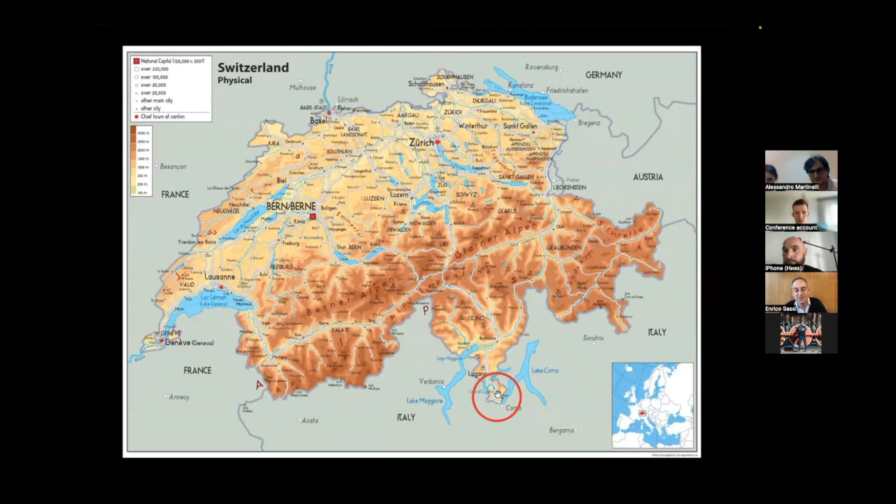They didn't have there a building in which to teach the science of beekeeping. The Casa dell'Ape is built here in Switzerland, in the center of Europe, in the Canton Ticino. In the south of Canton Ticino there is Mendrisio, and it's the place where the teaching center of Mezzana is built.

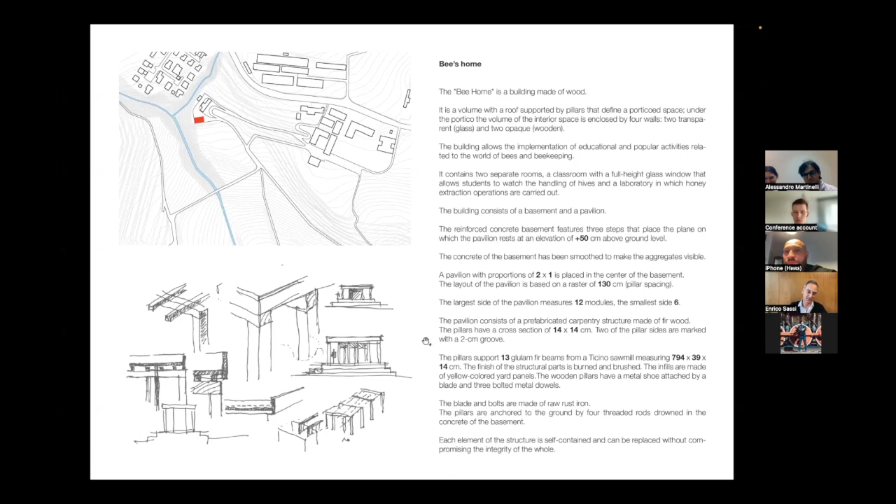The volume is basically a roof with pillars. It's the Tempio dell'Ape, the bee temple. The project is very simple, in fact. We build 3 steps, a platea, something to separate the architecture from the ground, like the classical temples. And after these 3 steps, we build a very simple wooden structure, a rectangle in proportion, with wood pillars.

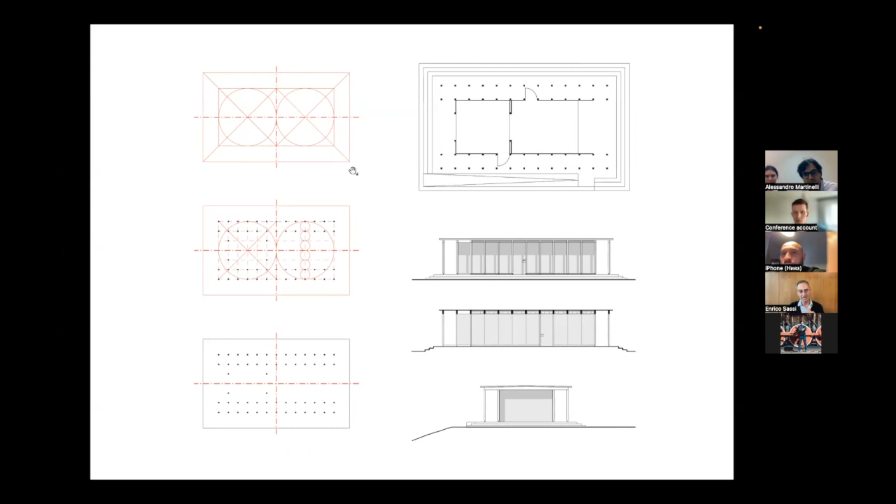The measure of the pavilion is also a rhythm, the raster. You have 12 modules and 6 modules of the partition, and then you have pillars prefabricated in wood and the roof.

This 2-room building has the laboratorio, where you make operations, so smielatura, when you work with the honey. And this is a classroom, and the classroom is open here, you look outside. This is a glazed facade, it's transparent, and this one is our opaque, it's wood. 2 blind facades and 2 transparent facades.

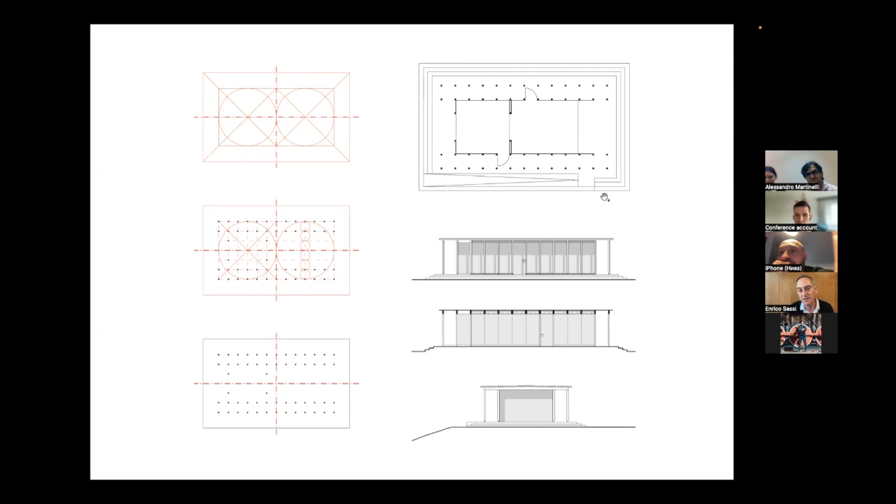This is the concept of the building. The building is light, it's in wood, it's prefabricated. Each piece can be changed without throwing away the building. So if you need to change this pillar, you change this pillar because it's autonomous.

And the building is constructed on this platea of Coldrerio, 3 steps to be up from the ground, transforming nature in culture. This is what Mario Botta also always says: when you put a stone on the ground, you change nature and you start to transform it into architecture. It's a very important, very sacred moment when you start to transform the surface of the earth.

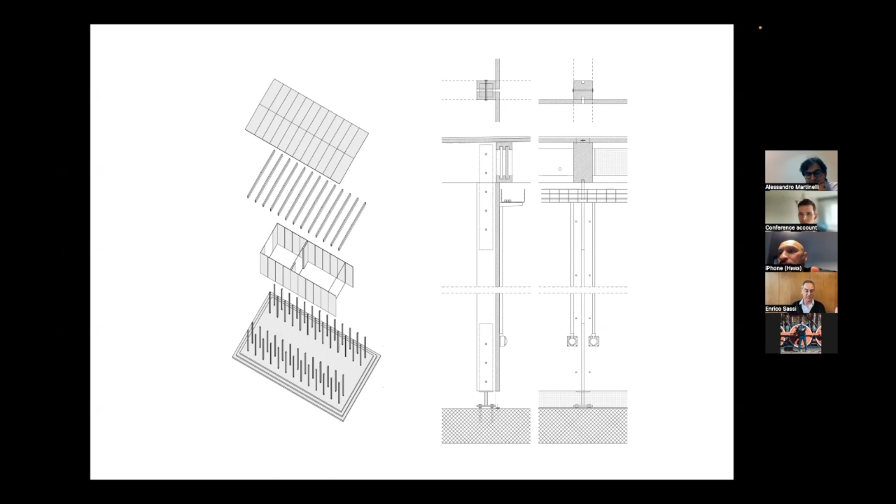We did some experience about this. These are the pillars. The pillars are burned and brushed, it's not painted. And the pillars are connected with this beam.

This is a design we prepared with the carpenter. The carpenter worked a lot, not on the site, but in his own laboratorio. It's a really prefabricated building.

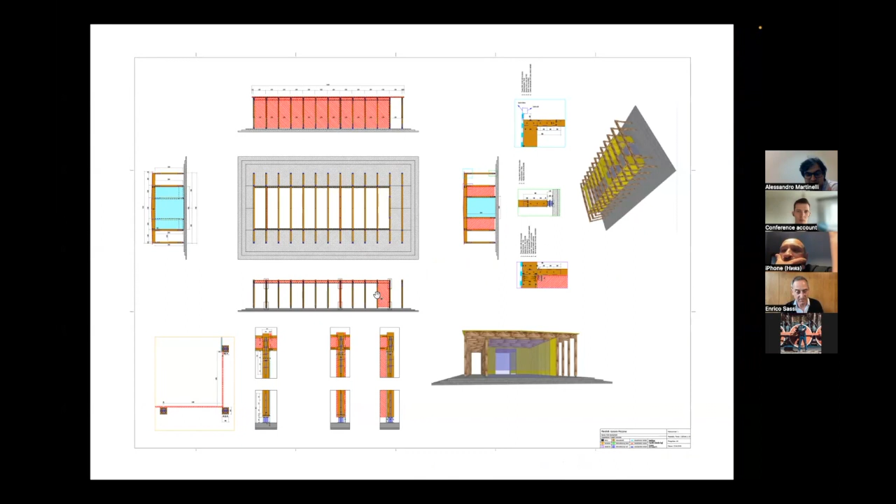We did some studies here. These are metal pieces to connect the wooden structure.

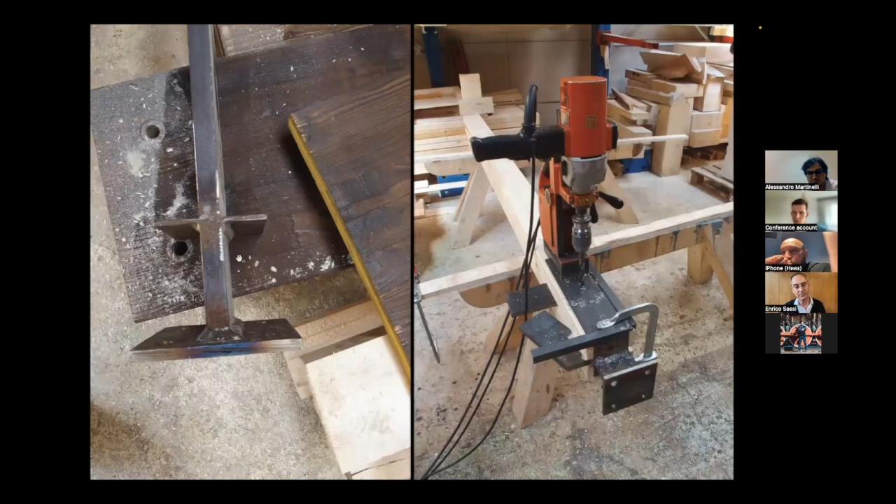Those are the pillars. The pillars receive a kind of design, you make here a cut, it gives more elegance to the pillar. And this leitmotif appears in all the structure. This is the metal structure that connects the pillar to the ground.

We've fabricated this, put inside the wooden pillar. The wooden pillar is burned, then brushed. When you brush, you need to brush in the direction of the vein, along the vein, exactly in the direction of the growth of the tree. It's like an old wood - you see the veins.

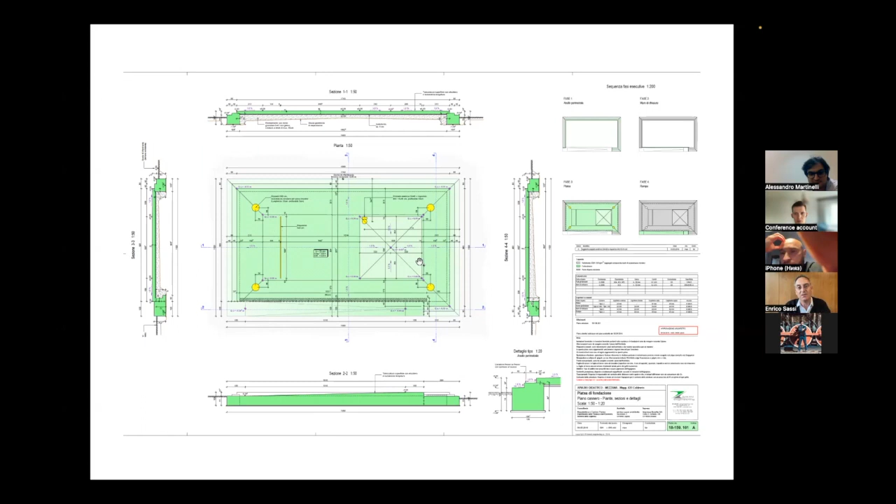With the engineer, we did also an important part, the concrete part. This is the sacred moment when you arrive and decide where the building goes, you trace the axis of the building. This is the engineer.

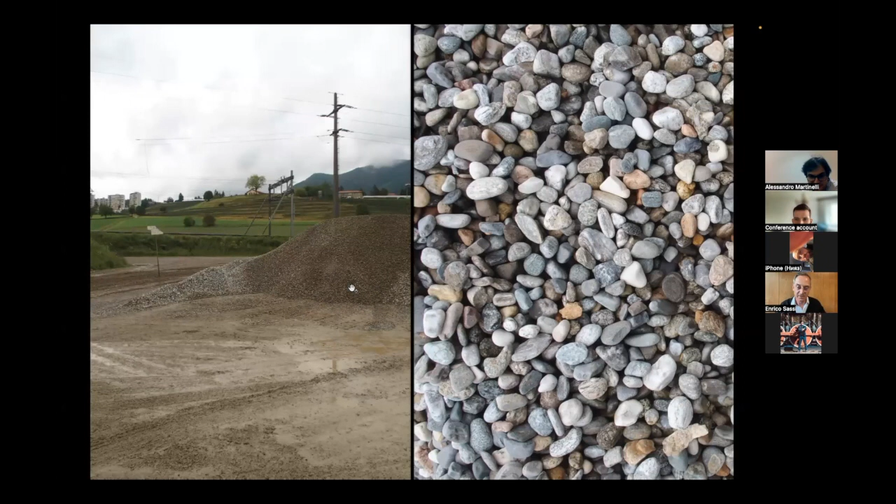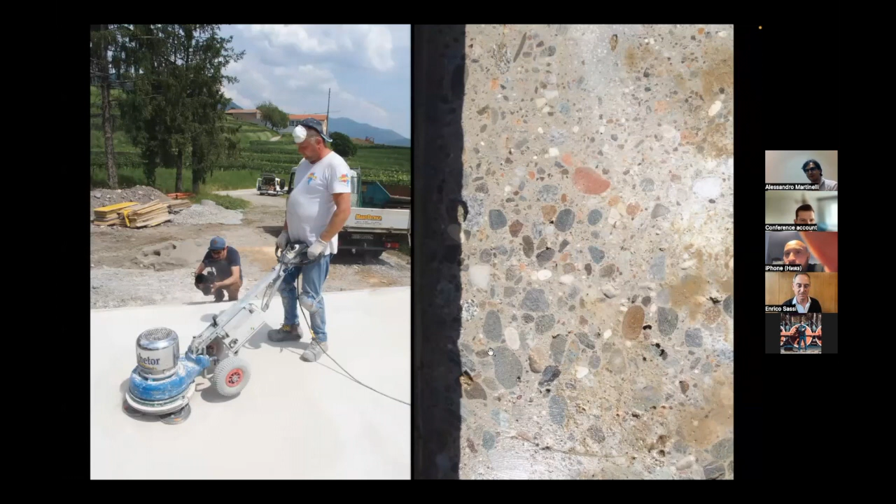Then you start to transform, you build the basis. The idea is to show the gravel of the concrete, because concrete in nature can be nice, but also not so nice. So the idea was to have a concrete structure looking not so technical. We put some gravel also up, and then it was polished - maybe the word is polished. You take away some surface of the concrete and leave the stone of the gravel coming out.

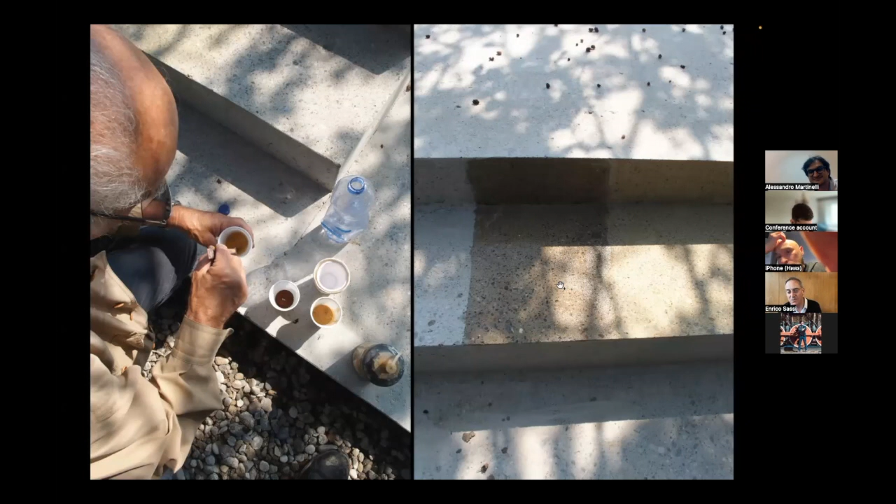Then the color is gray, it's concrete. So the idea is you need to give some protection - it's an oil, a product. Put some pigment on the oil. This was brown, this was yellow, and we decided to give some color to the protection, and this is the final result. It's not gray anymore, it's more earth color, more yellow, more orange.

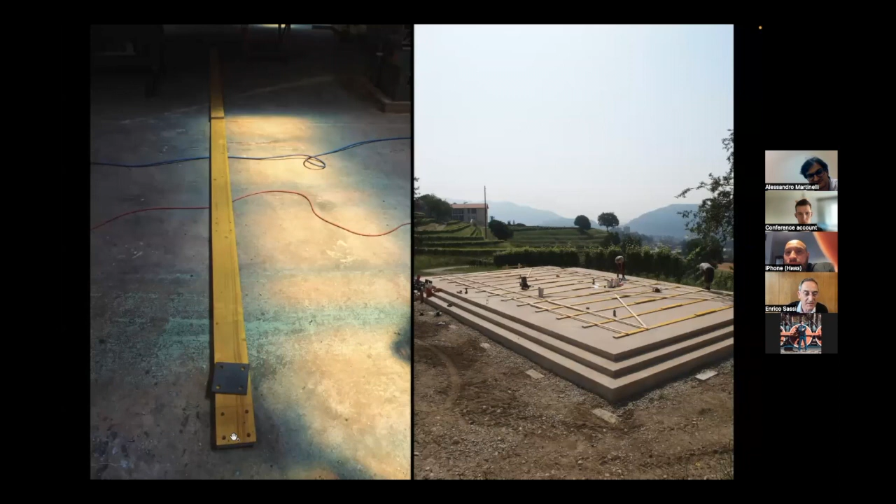This is one part of the work finished. You prepare the ground for the structure. Then the carpenter cuts and designs the plan on the floor. These are called DIMA - I don't know the name in English. It's like a model, to design on the ground these four holes.

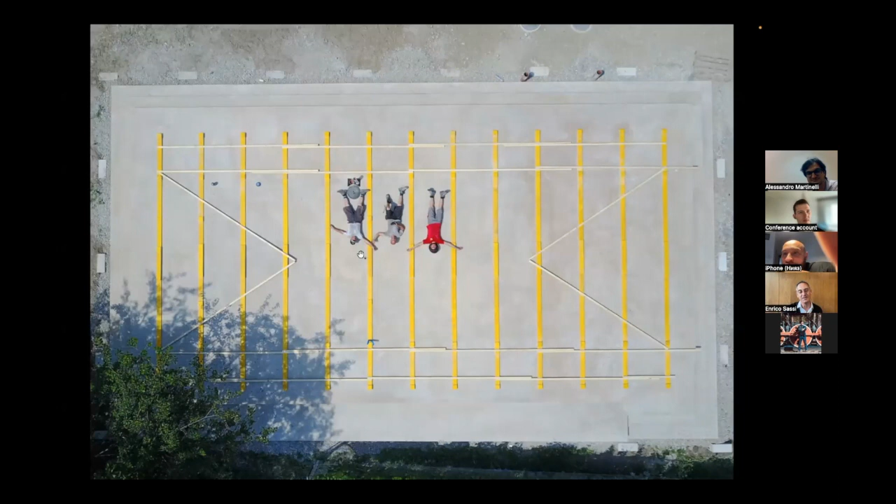It was very hot this day. This is the carpenter - after the work they were destroyed, but they had a drone, so I like very much this picture of the working people. After this work, they make the design, they make the holes in all this structure for the pillars.

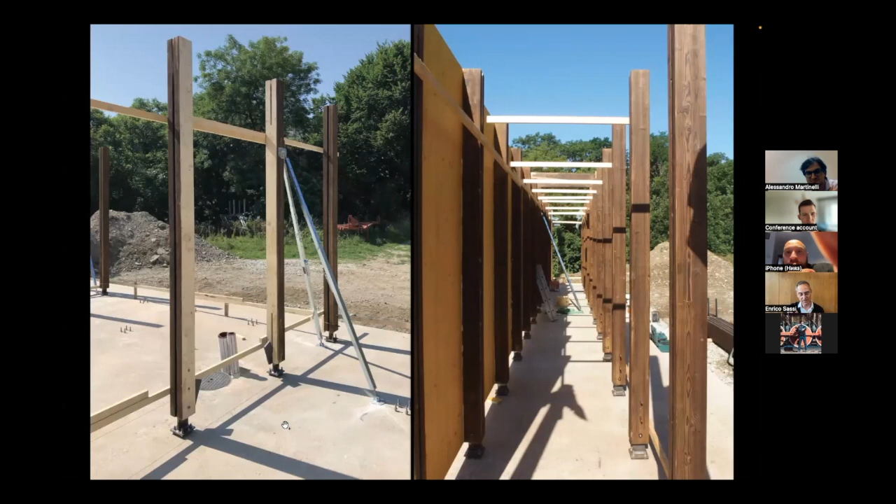Each pillar has four rods. You need to do this work very precisely, because if you do this, the work becomes very quick - you arrive with your pillars, put the pillars, fix the pillar, and then start to close the building. This was one day of work.

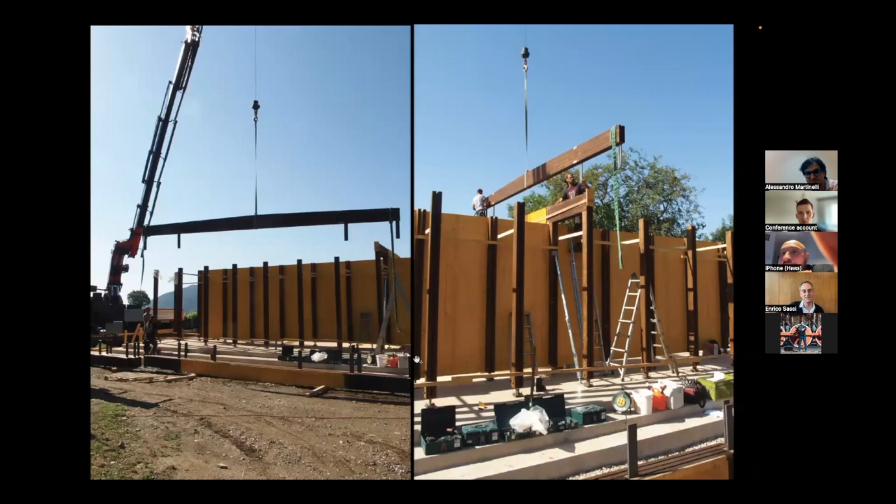In one day of work, the structure of the building was built. You see, they put the pillars, then they put the beams, connect the beams with the pillars, fix it, and then it's closed. When you close, you stabilize the structure also.

These panels are very thin - the walls are only this, panels very thin. These walls stabilize, and the roof also stabilizes all the structure. It's a self-ventilated building, it's open - you put a net there in order to keep the bees and other insects outside, but the air can circulate. On the ground, there's 10 centimeters of empty space where air can pass.

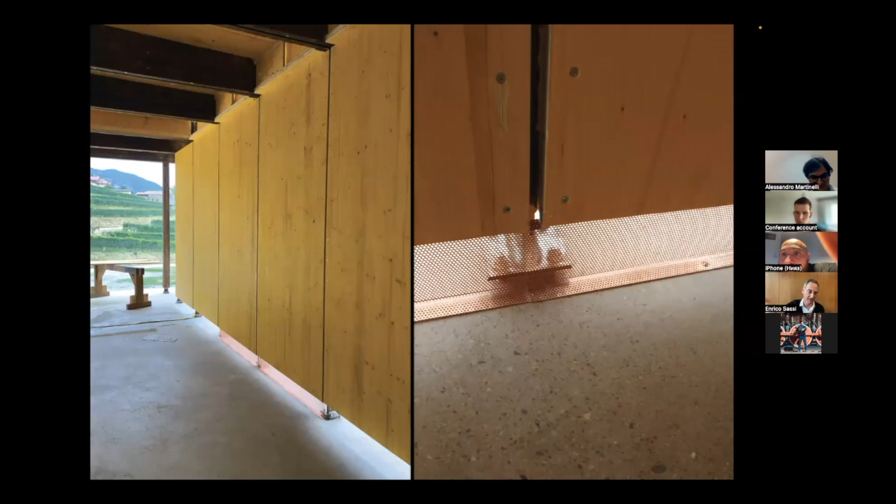We made some water system, and the final result is this. It's in the place, it's very light. Also the roof is very thin.

It's a low-tech, very low-tech building. Pillars prefabricated and wooden panels, no insulation, nothing like that. The roof also is very thin, only a panel with tar paper, with waterproofing on the wood. Very simple.

You see the mouth, the big wall, to be inside and look at the beekeeper working with the bee houses. You need to have a curtain, because if you don't close it, the birds were found dead. With the curtain, the birds stop. The inside is yellow, the outside is yellow - it's not because of the bees, but because of the color of the panels.

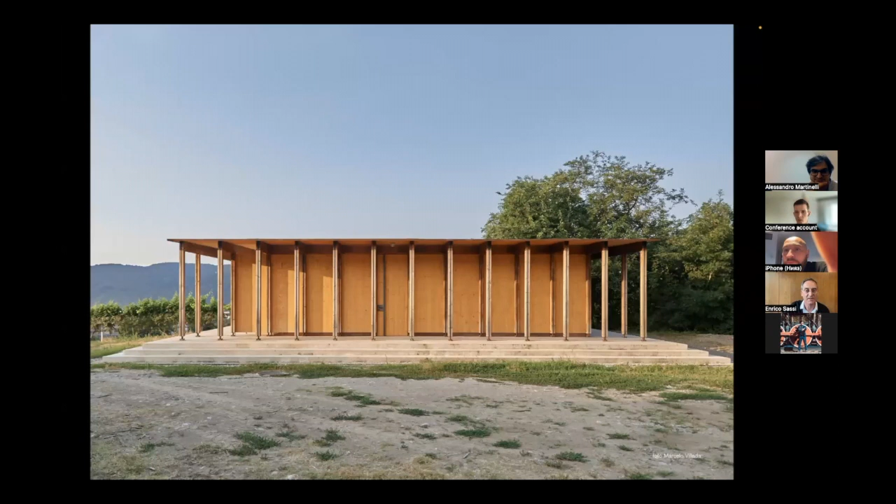It's like they arrive - you can see here the pillars with this design. The beams also have a light inside this line. You see the open space on the ground and on the ceiling.

Some kind of Japanese picture. The place is very nice also.

This is called the Queen's Terrace, il terrazzo delle regine, because each people have a queen, and the bees' home are there, and they fly out from this terrazzo delle regine. It's very poetic also as a name.

And this is the classroom in which beekeeping is taught. You see in the beams we have some LED lines, and all the electricity is exhibited. You can see it, and we don't have space inside the wall. It's all outside, in vista.

Also, it's all declared - the laboratorio to do smielature. We need some hygienical finishing, so 2 meters of the wall are cladded with inox metal.

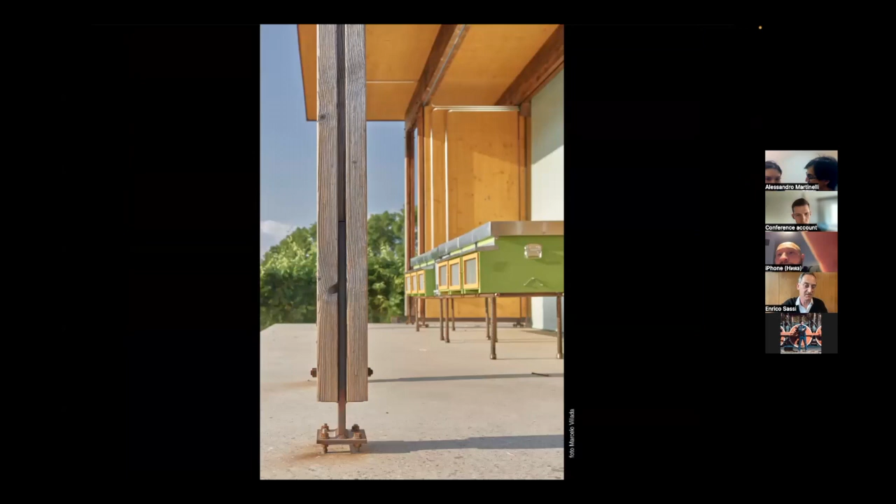The finishing is all rusted. It's metal without trattamento - it becomes rusted with time. And everything is outside, you can see.

This building was finished 4 years ago. It was published in Domus, and it was also published in Divisare in 2021, the Calendario of September with Herzog and de Meuron. It's an honor, and it's nice to share with you this honor.